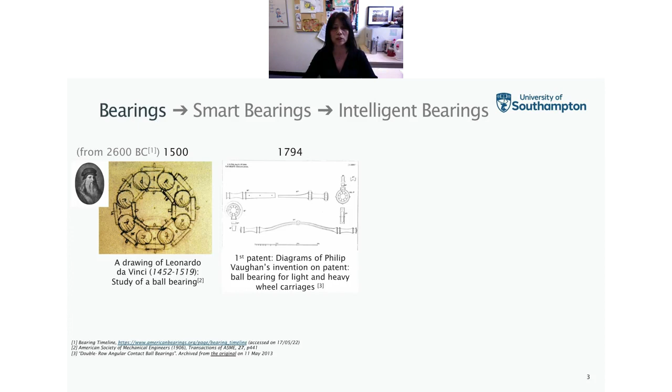Not until 1794 was the first patent on the bearing filed, an invention by a Welsh inventor. This is a drawing from Philip Vaughan's invention, in the patent he published: a ball bearing for light and heavy wheel carriages, showing how the bearing structure looked. So that's nearer to the 1800s.

Nearer to 100 years later, you can see three big inventions in bearings, including Friedrich Fischer, the German inventor who developed a machine for metal ball grinding.

So that was the beginning of the modern ball bearing. He was also the father of the modern ball bearings, and also the founder of Schaeffler, the FAG bearing company in Germany.

In 1898, Henry Timken developed tapered roller bearings, a new concept that could support both axial and radial loads. He was the founder of Timken bearings, one of the three largest bearing manufacturers in the world.

In 1907, the Swedish inventor Sven Wingqvist developed self-aligning bearings and founded SKF. So those are the three major bearing manufacturers in the world, and in the early 1900s all these inventions happened.

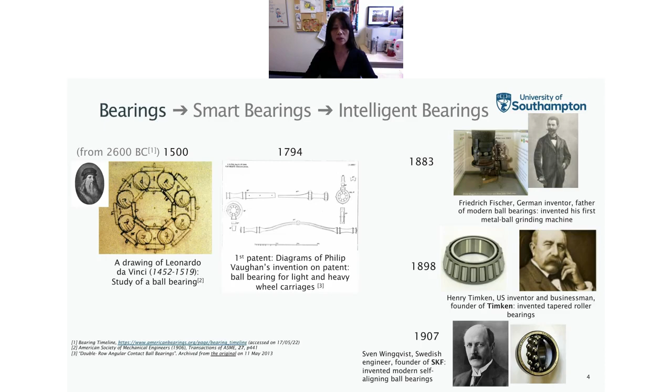That led to the development of rolling element bearings for machines. Bearings became a key component for loads of different machines, from small to large, and they are key to the world moving. Without bearings, we cannot imagine how the world could move.

In addition to the different types of bearings I introduced, like ball bearings, roller bearings, tapered roller bearings, and thrust bearings, you can also see the size of bearings change, from 1 millimeter diameter, probably used in medical applications or brushes we use every day, up to over 4 meter diameter bearings, like in diggers or tunnel boring machines. They are used in all kinds of applications, which is why they are so important to engineering designs.

Bearings are very important, but they are not actually the most expensive or valued components in machinery. But a small damage in the bearing can lead to very big disasters in machines.

Here you can see a perfectly operational helicopter turned into this wreckage due to a very small, undetected bearing failure in the gearbox of the helicopter. This was reported in 2016 in Norway, an accident involving a helicopter. These kinds of things do happen in lots of situations.

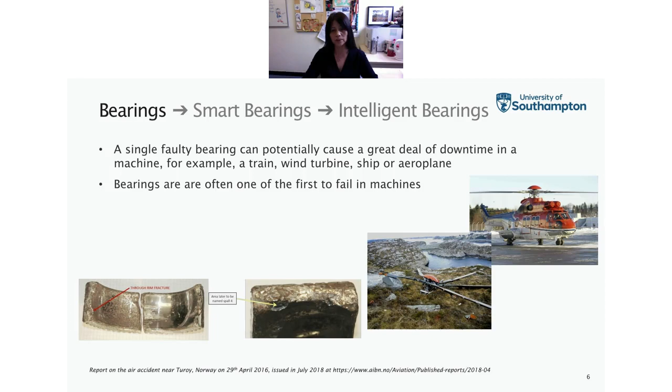That's why bearing safety is extremely important for the operation of many machines. That's why the smart bearing concept started, to look at how we can monitor the bearing, make it perform better, and improve its reliability.

The smart bearing concept traces back to 1908, when J.E. Francis introduced his slip prevention regulator for rail vehicles, which led to the development of the modern anti-lock braking system for wheel bearings. This was a very initial development, but not until 20 years later did a patent come out about ABS, by Karl Wässel in Germany. Unfortunately it was just a patent, and no product was produced based on it.

Until the 1950s, Dunlop Maxaret had actually installed ABS into aircraft engines and bearings in cars, when it started to become more popular. That was the first version of what we call smart bearing, where you have a bearing and a sensor to monitor its speed, which can then be used to calculate the braking distance.

Building on the concept of ABS, smart bearing design has been developed over the last 30 years by all the major bearing manufacturers - SKF with Insight, and also Schaeffler and Timken. They all have different concepts or designs of smart bearings, where they can put sensors in the cage, in the ring, or in the housing of the bearings.

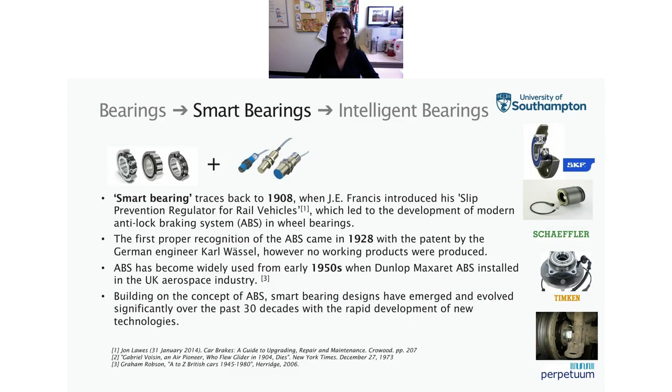To summarize the development of smart bearings: it started in the 1990s, when you had a couple of sensors embedded or mounted as a unit on the machine to monitor bearing performance. Ten years later, when wireless communication techniques started, people began using more sensors embedded or mounted in the cage or rings, transmitting data wirelessly to a different location rather than on the machine.

In the last 20 years, as energy harvesting technology has become more approachable and usable, people started using self-powered sensors and self-powered units, with more sensors or networks of sensors mounted or embedded into bearings, and using radio frequency identification chips for the monitoring of bearings.

Also, there were thin film deposition techniques used to put sensors, actually printed sensors, on bearings as well. So there's been a lot of development in the last 30 years for smart bearings.

I would like to differentiate the smart bearing from the intelligent bearing by adding intelligence to the bearings with embedded sensors, which becomes an intelligent bearing.

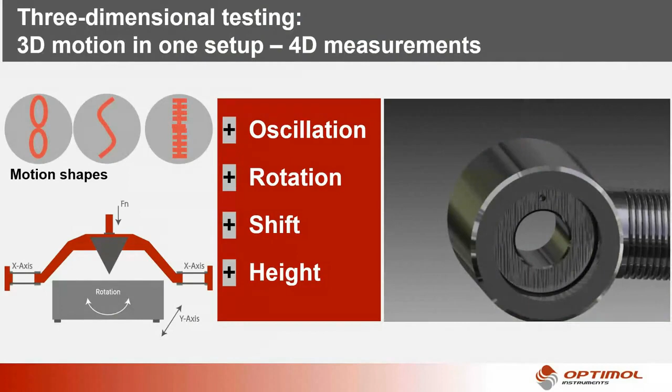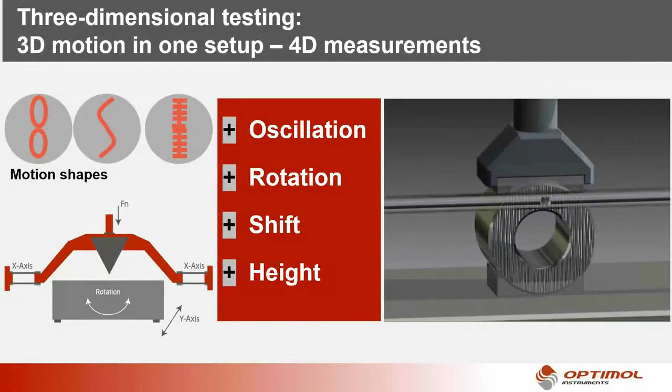Welcome to our third edition of SRV Tribo Talks. I would like to invite you to take a look at some of the many tribological solutions we and our customers have developed on the SRV test system. For example, the SRV allows you to generate tribo contacts with complex 3-axis movements and measure them in 4 dimensions. The high practical relevance of the simulation and relevant measurement data create valuable knowledge about your product. The ability to use your own prototypes and series parts in the SRV test environment is key to achieving relevant results quickly. To this end, you benefit from an installation space of 50 × 40 × 200 mm. Your components can be tempered up to 300 centigrade.

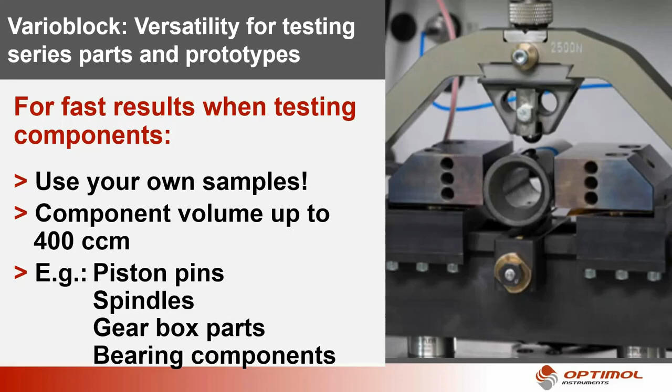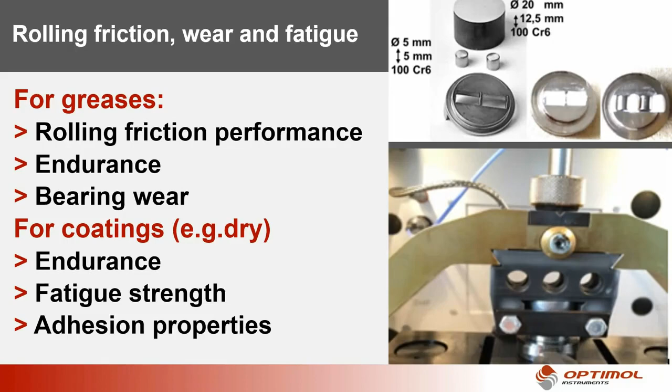Rolling bodies are found in bearings and gearboxes, often as lubricant systems, but increasingly also dry running. With the SRV, we enable you to screen your greases and coatings under realistic load collectives with relative speeds up to 1 meter per second. Using multi-axial movements and test setups, you can transfer complex movement sequences to model testing in the SRV and thus test the real system on a laboratory scale. The results can be transferred directly into practice or simulation. A very well-known example of such movements is the piston-pin rod-eye contact.

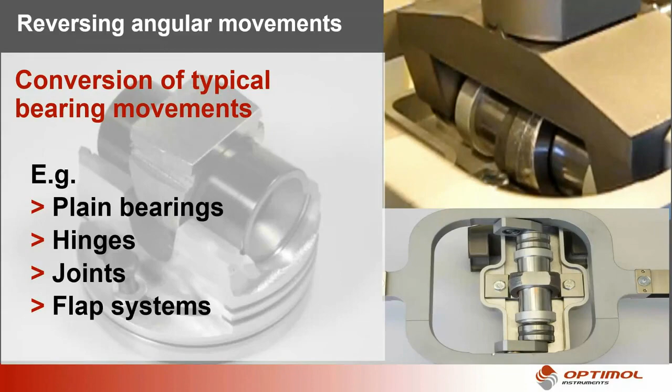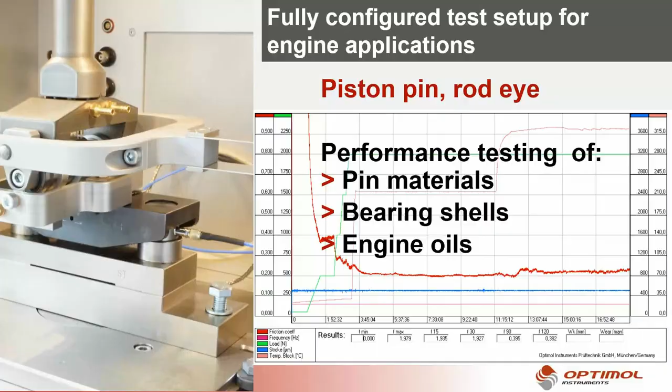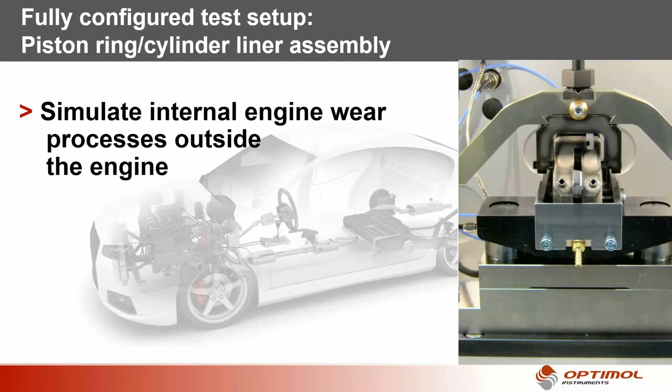Here, the SRV allows you to simultaneously test pin materials, bearing materials, and engine oils in one test setup. Tribological model tests provide insights into tribological systems that are otherwise difficult to access. The simulation of internal engine wear processes outside the engine is an impressive example of this. The metallurgical properties of your materials under the influence of temperature can be analyzed in a range from -45 to +1000 centigrade. The simulation scope varies from simple abstracted test geometries to original parts.

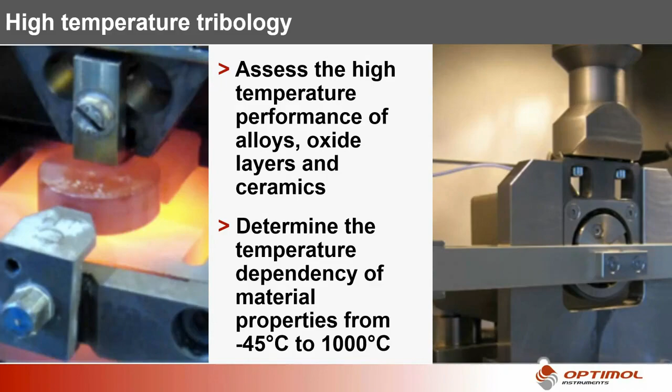The test setup shown is used to evaluate high-temperature materials in plain bearings. The SRV's ability to represent tribocontacts extremely realistically in a model environment is one of the reasons for this worldwide success. Do not hesitate to call us if you want to address a friction and wear related problem through tribo testing. We will be happy to support you.

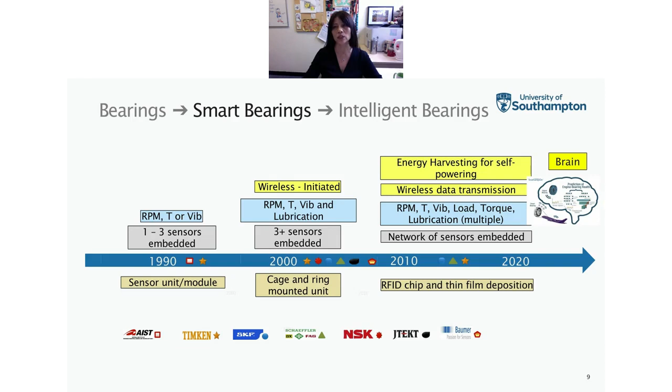So I'll just pick up from the smart bearing, that means the bearing has embedded sensors. So you have multiple sensors, maybe with wireless communications and energy harvesters that provide power. But to become an intelligent bearing, we wanted the brain to be implemented into the bearing.

So this is a drawing that illustrates the project we're doing in the I2BS project. We wanted to develop an integrated intelligent bearing where you have bearing with embedded sensors, wireless communication, power in the engine, which will be mirrored by a digital twin of the bearing that uses artificial intelligence techniques to analyze the data wirelessly.

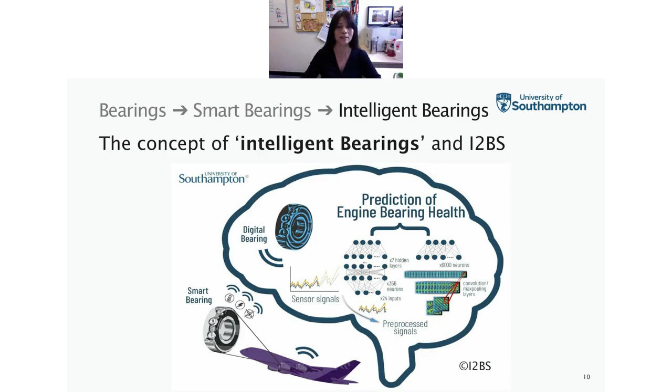Then provide the prediction of the engine bearing health automatically. So that's the idea that becomes intelligence, because you have the intelligence to tell the engine what condition the bearings are in and how you can improve or change the conditions that the bearings are operating at the moment. So that's the change from the smart bearing to intelligent bearings.

So we're looking at the zone in the engine where you have the challenges of high temperature. The environment that the bearings are operating in is up to 200 degrees, which would eliminate most of the electronics, because most electronics are working under 80 degrees. So that's very challenging for electronics.

And also the bearing speeds in the full scale are probably up to 3,000 RPM, but in the subscale testing for the same DN, it's actually over 10,000 RPM, so it's extremely high speed as well.

And also within the engine, you would have vibration from the engine, and also vibration noise from the environment that the airplane is flying in. And also within the engine bearings, you need oil lubrication, so you have the harm or hazard caused by the oil as well.

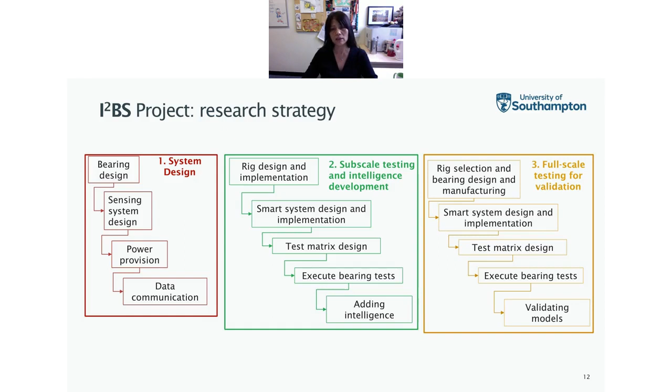We developed the intelligence to predict the bearing faults or detect the bearing faults based on those data. Then we commissioned the test on the full-scale rig and ran a limited number of tests and validated the models that we developed from the subscale.

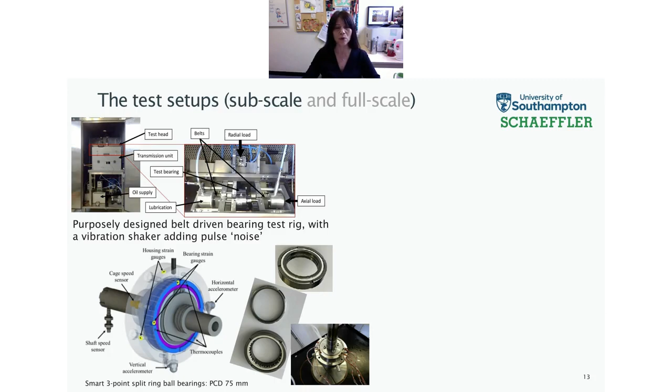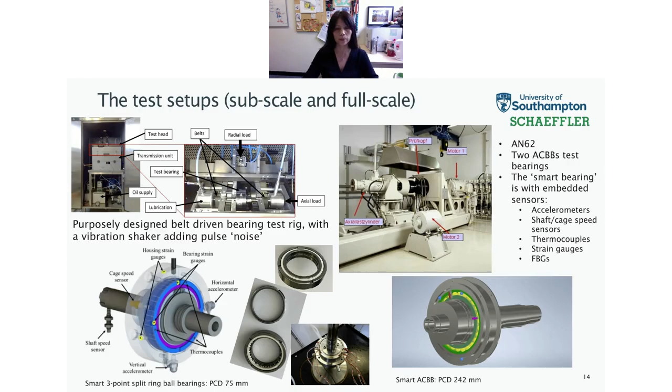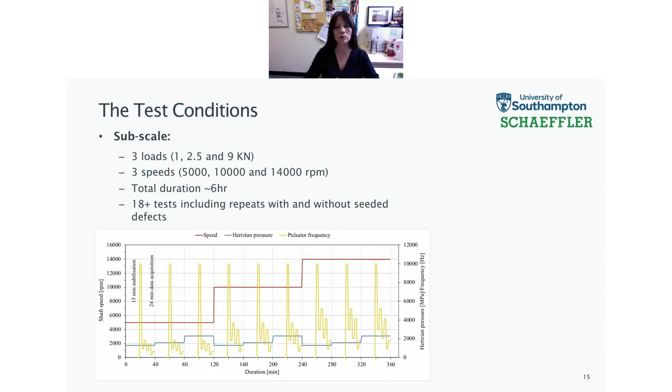In terms of test conditions, on the subscale we were able to test 3 loads. Within each load we varied the speed 3 times as well, at 5,000, 10,000, and 14,000 RPM. The total test duration was about 6 hours each, and we ran over 18 tests including repeats. Every condition we wanted to repeat, to see how repeatable the signals were.

For the full scale, we ran typical flight cycles, including ground idle, takeoff, climb, flight idle, reverse, and ground idle. All the conditions involved in different steps were simulated in the full-scale testing. We were going to test the bearing for a maximum of 150 hours, but the test actually failed much earlier than we expected.

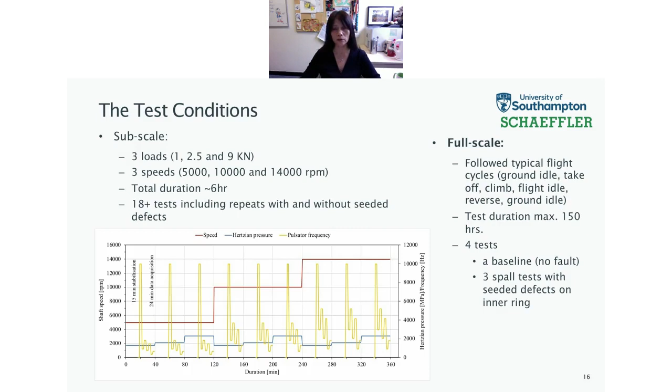That was probably one of the things we wanted anyway - we wanted the bearing to fail, we wanted the seeded defect to lead to spalling, so we could see the changes in conditions and actually analyze it. We only did 4 tests on the full-scale rig, because the cost is really, really expensive.

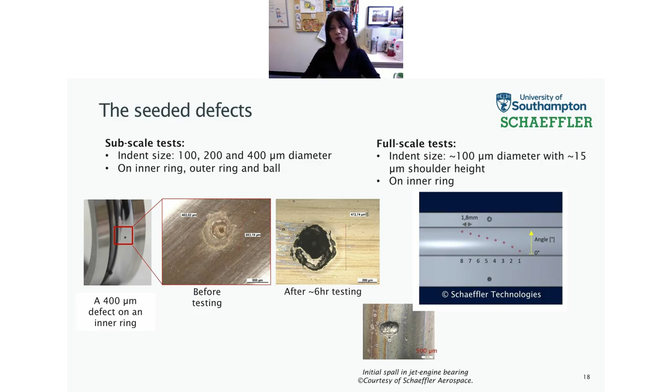For the full-scale test, we put an array of indents in the inner ring to make sure the ball would roll over the damage, and we generated a shoulder height on the indent to guarantee spalling of the bearing. With the limited number of tests we could run, that was the strategy we took for the testing.

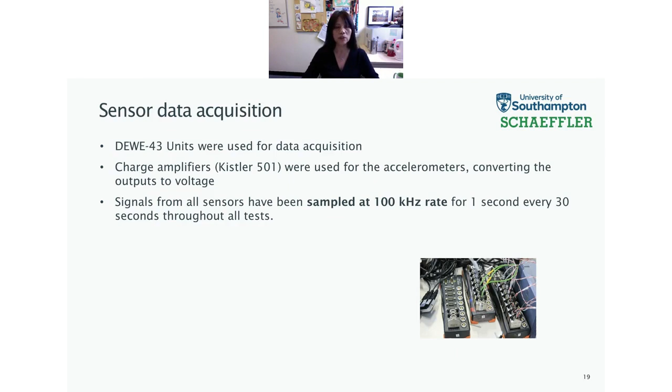For sensor data acquisition, we used the DEWE-43 units to collect the data. All the monitored channels were sampled at a 100 kilohertz rate for a 1-second duration every 30 seconds, for both the subscale and full-scale tests.

I wanted to go back to the intelligent bearing part, to add intelligence to the smart bearing. Initially you need to select one of the machine learning tools and use it to see whether it can improve the detection of faults. Then we wanted to select appropriate inputs for the chosen model, and train the model with the selected features, or you can choose the raw signal to train the model, then do model validation and testing with new data to finalize the model for bearing fault detection.

We developed the model on the subscale test rig because we had loads of data, and also worked on the full scale, because the bearings there are totally different - different sizes and different operating conditions.

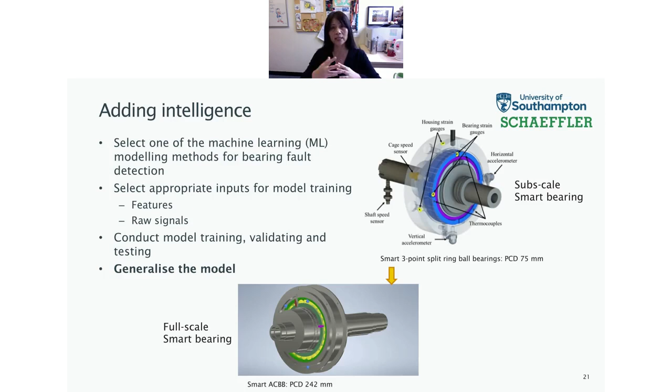So the challenge for using machine learning is how you can translate or transfer your one model to another, different operating conditions, different sizes. That was the challenge we were facing, how we can translate our model developed in the subscale to the full scale, because for the full scale test, we only have 4 tests, as I mentioned earlier.

Just to go back a little bit about machine learning based model methods for bearing fault diagnosis. Obviously, in industry, people have been using different conventional signal processing techniques to diagnose bearing faults. They do work, but there are lots of challenges to do that. So recently people started to look at using machine learning based techniques to improve the diagnosis.

This goes back to the 1940s when artificial neural networks were introduced by McCulloch and Pitts, but that wasn't used for bearing fault diagnosis. It was just people thinking we should have computer networks similar to the human brain's thinking network. Not until the 1950s was artificial intelligence originally developed, and that was the first thinking about making computers more intelligent. Over the next 20 years, artificial intelligence mainly used expert systems, fuzzy logic, and artificial neural networks for other applications.

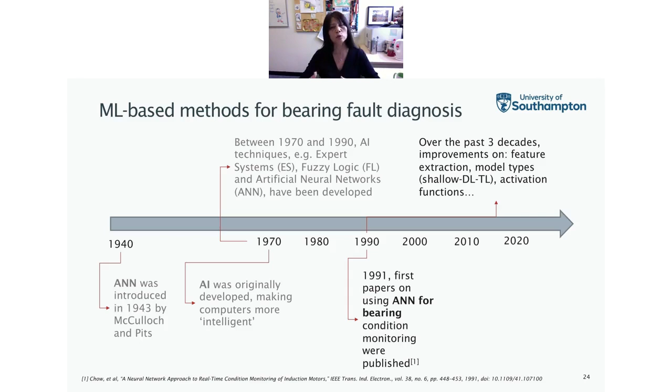Over the last 30 years, loads of methods have been developed and improvements have been made, mainly focusing on feature extraction methods. What features are best for bearing fault diagnosis using machine learning based methods, what type of models should be used, what activation functions should be used, how can you speed it up, how can you transfer the learning from one system to another. So there's been loads of development attempted.

So the achievements to date are high accuracy. If you read the papers in the literature, everyone claims their methods are very effective, so they can detect bearing faults at 100% or 95%. Everyone has achieved very high accuracy.

But the challenges are that loads of these developments are based on certain limited data, and the generalization ability is poor. None of them have shown very good generalization ability, meaning translating from laboratory data to, for example, real applications.

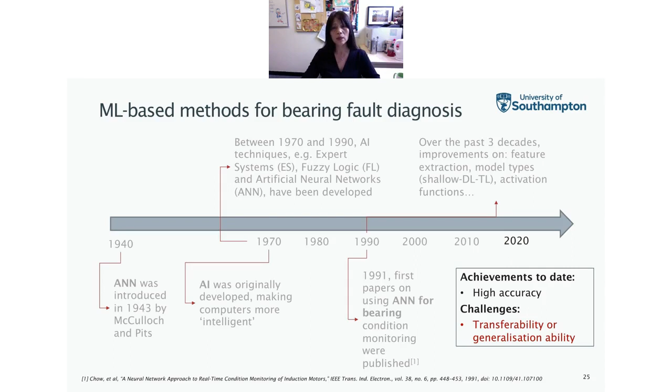So artificial intelligence and machine learning overview - I'll give you a very quick overview of this before I talk about the methods. Artificial intelligence can be separated into two categories: one is good old-fashioned AI, and one is machine learning based AI.

For the good old-fashioned AI, these are mainly symbolic types of AI, using rule-based or expert systems. Bayesian, or simple Bayesian techniques, is statistic-based, which can be considered statistic-based machine learning, or it's in a very early stage - it was used in the good old-fashioned AI techniques.

With machine learning techniques, we can separate them into pattern-based, so pattern recognition based, or statistics-based. The statistics-based methods look at different distributions, including naive Bayes, decision trees, k-nearest neighbors, Gaussian mixture models, or logistic regression. All these are based on the probability or distribution of the data to find their relationships.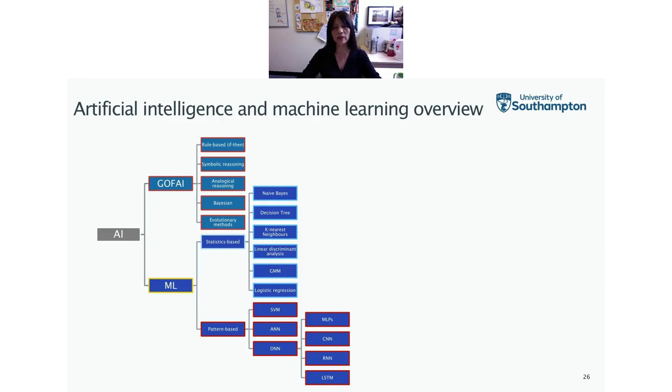In deep learning, you would probably have multi-layer perceptrons, convolutional neural networks, or recurrent neural networks. All these deep learning neural networks have more than two hidden layers, so they're actually called deep learning. It's similar to the shallow ones, but with more layers, more neurons, and bigger networks to work on more complex problems.

So the disadvantage of using the good old-fashioned AI is that it does require human intervention, because the rule base is that we define: if this happens, then you give that result, or symbolic, giving a different interpretation of the features. For the statistic-based methods, they have the advantage of not needing hyperparameter training, and could provide a physical explanation.

That's one of the best things that statistic-based techniques have, can provide a physical explanation, which the pattern-based techniques don't have. But they do need a certain level of predefined conditions as well. So like the decision tree, you have to say, okay, from here, if level above this is that, level below this is the other one.

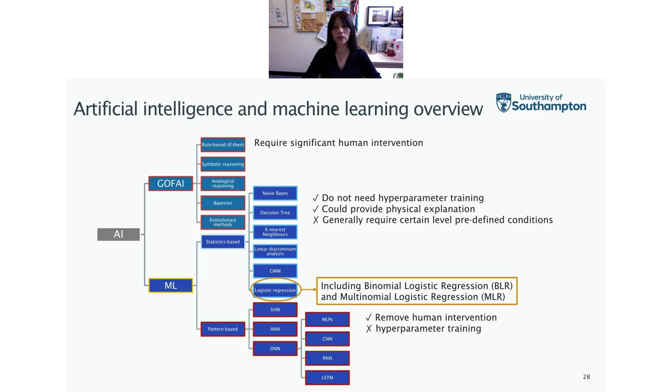So you do have to define all these parameters for it to work. So with our work, I wanted to show the result we achieved using the logistic regression method. It is obviously a statistic-based method. You can use that as part of the machine learning method for bearing fault diagnosis as well. So we're actually using the multinomial logistic regression, not the binomial logistic regression, which I'll show you the results in a minute.

In terms of developing the intelligence for bearing fault diagnosis, we have developed a novel method to extract features from the bearing vibration signals using a combination of the cepstrum pre-whitening and the high-pass filtering methods, to replace the original high-frequency resonance technique.

As I mentioned before, the HFRT has become an industrial-realized method that is very powerful for bearing fault diagnosis, but it has the disadvantage that you have to define the resonant frequency very correctly to be able to detect and diagnose small features, small faults, I mean.

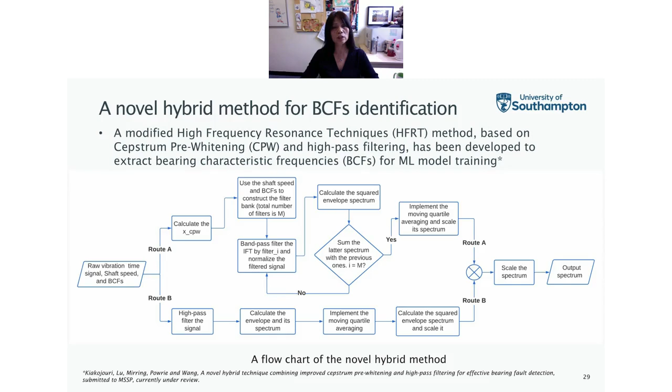So here is just a flow chart to show how the new technique works. Basically you go through route A using the cepstrum pre-whitening method, going through all the data to create a spectrum, and also you use the same data, go through the high pass filter and go through all the enveloping, and then get a spectrum here. So they add the two together, you create a joint scaled spectrum to look for the features that are related to the bearing characteristic frequencies.

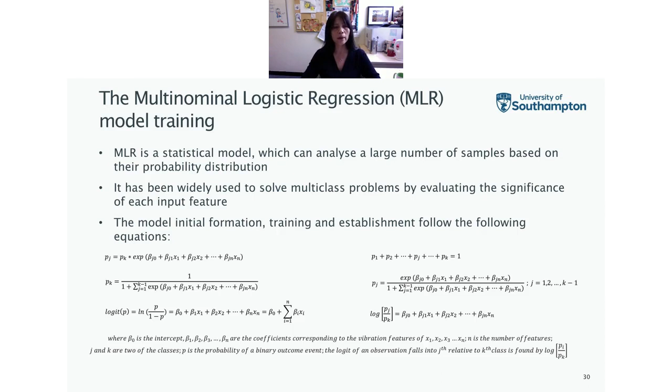So I'm going to show you the machine learning part. As I mentioned earlier, we're using the multinomial logistic regression model for the prediction of the faults. I will not go through all the mathematical details. Basically, we're using a series of functions to calculate the coefficient for different features, then work out which feature is the best and how we can classify different faults into different classes based on the contributions from each feature.

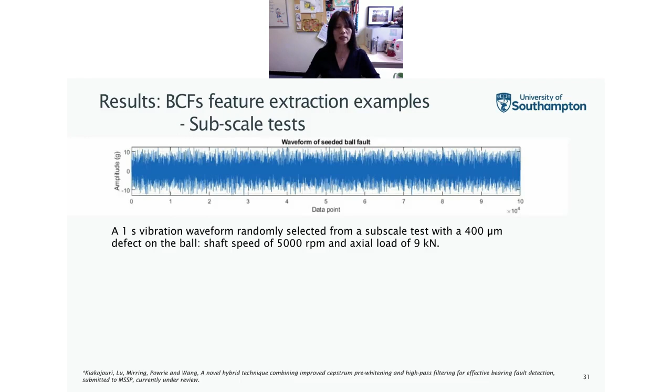So this is the waveform, you can't really see very much from here. This test was from a test with a ball damage of 400 micrometer diameter. So we analyzed this one waveform using different methods, including full band enveloping, using basic cepstrum pre-whitening envelope, using high pass filter envelope, and also using the improved cepstrum pre-whitening method.

All these have been introduced in a paper that we're going to publish, so if you're interested, I welcome you to read that and find how exactly we did these. But here, I'm just comparing. This is the new method, the combination of the two methods, the cepstrum pre-whitening and the high pass filter. You can see here clearly that we can detect those peaks, which are related to the ball spin frequency and their sidebands. So the new method had improved the features that we're looking for that are related to the fault in the bearing.

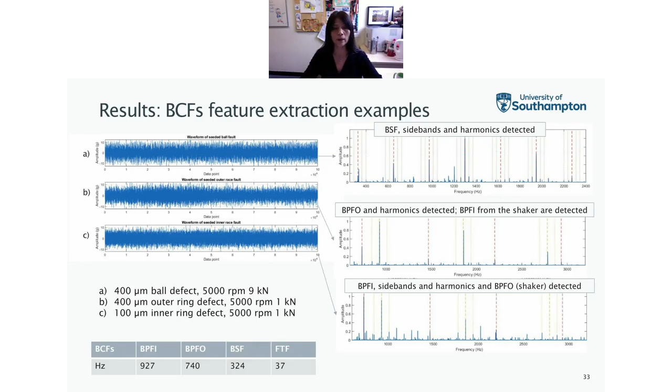With this one, you can see that it's the signal from the bearing with the inner ring damage, where you can see clearly the inner ring fault frequency and their harmonics and their sidebands very clearly here. We also see the outer ring damage from the shaker as well detected. So just to show that with the new method we have extracted a better quality of features, and you will see that later on with the machine learning we are able to build a much better model as well.

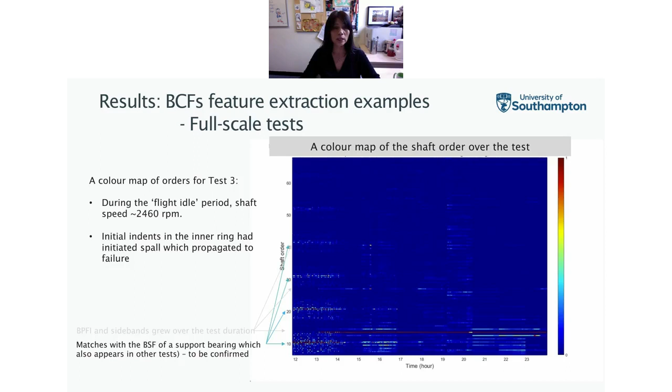You can also see the growth of the second harmonic and the third harmonic as well. But you would notice that we see some features at the beginning here - this one, that one, that one, the other harmonics of this frequency, which is not related to any of the defect frequencies that we were looking for. At the moment, we are waiting for confirmation from Schaeffler to see whether it is one of the support bearings that failed in the rig, but we're still waiting for that.

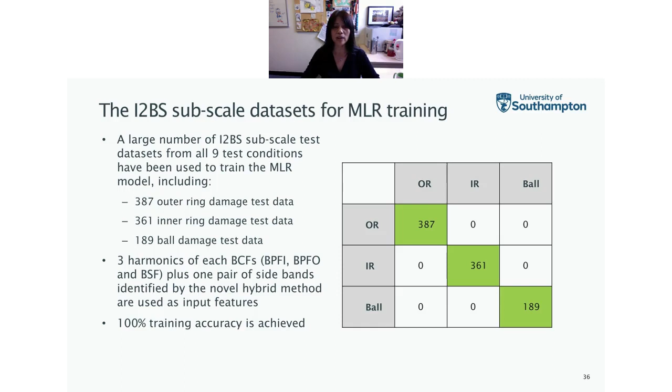So this brings us to the machine learning part, using multinomial logistic regression. We trained a model using 387 data points from the outer ring damage test, 361 from the inner ring damage, and 189 from the ball damage. We achieved 100% accuracy from the training for the model.

With this model achieving 100% accuracy, we then tested the model with two more datasets from the literature. One is from the Case Western Reserve University - this database has been widely used for bearing diagnosis research, and I will show you how this model works with this data. The other is a dataset that our PhD student Amir Masood found, which we also tested. We haven't run the full-scale test on that one yet, but we are going to do that later, so I can't show you the model validation with that one, but I can show you with those two datasets. Here is the confusion matrix for the Case Western Reserve University data.

As you can see, the first one on the left is when we use all the data from the CWRU - we achieved 82.8% accuracy, meaning 82.8% of the data was detected correctly. You can see 23 of the ball faults were classified into either outer ring or inner ring faults. So these are the results we achieved with all the data, and what we found is that this is much better than the equivalent study by Randall.

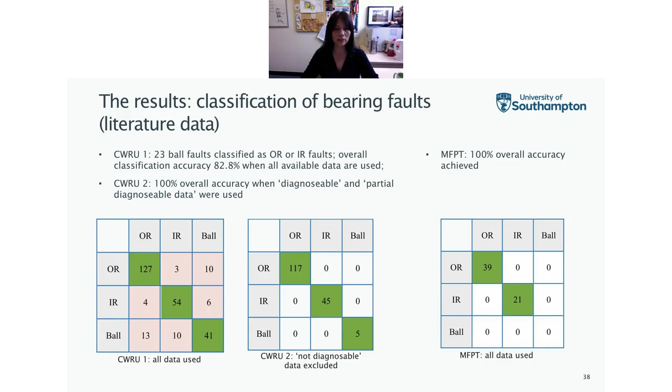With the other data from MFPT, 100% of the faults were classified accurately. I forgot to say that when we did this, we didn't need to train the model again. We only put the data from the literature database into the model and saw how many cases were classified accurately—there was no new model training. So that's really exciting to see the transferability of the model.

I think I've probably overrun a lot, so I just want to conclude with a few points that hopefully you can take away from this talk. Bearings are vital to many rotating machines, and their health is key to the normal operation of those machines, especially for those very high value and safety critical ones.

To add to the intelligence, we can use a lot of machine learning techniques. Lots of people have been looking at it, but one thing that's challenging in the development is sufficient data. Lots of studies reported in the literature use the data I showed from Case Western Reserve University, but that data is not perfect—there's loads of issues with that data.